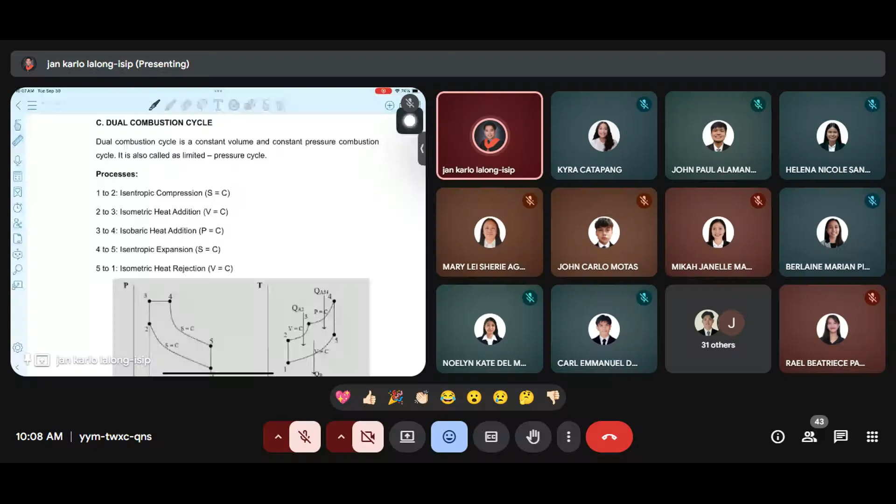When it comes to identification din natin ng ating state points, we have our pressure, volume, and temperature at different states ng ating cycle. So, I advise for you to kindly review, take note of that, kasi kung dun pa nga lang sa Otto cycle, hindi na masagutan, how much more if we have a dual combustion cycle.

Kasi in dual combustion cycle, we are now going to combine yung ating Otto cycle or the constant volume heat addition at saka yung ating constant pressure heat addition. So yung ating dual combustion cycle, that is a constant volume and constant pressure combustion cycle. So dalawang beses yung ating magiging heat addition. So by using that, we are making yung ating system more efficient. So it is also called yung ating limited pressure cycle.

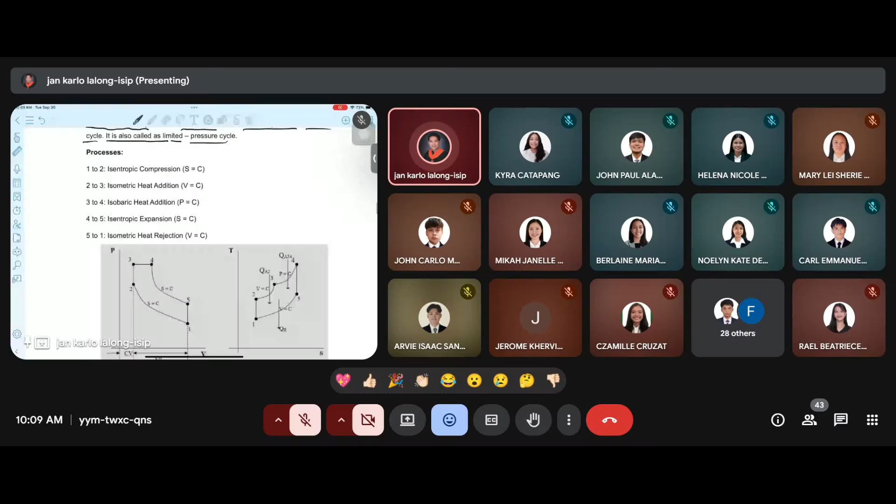So ano ba yung processes natin kapag sinabi natin dual combustion cycle? So ngayon, kapag meron tayong dual combustion cycle, ito yung ating PV diagram. So pareho lang naman, we still have yung ating intake stroke. So again, hindi na sinasama yung ating intake stroke diyan sa ating PV diagram. So wait lang, medyo delay pala yung screen. So we have yung intake stroke dito that is not already included in our PV diagram when we are analyzing.

But you must take note of that kasi as I can see, ang unti lang na nakapag-explain kung paano nangyayari yung ating four-stroke cycle or the combustion cycle natin using the four-stroke cycle natin. So, balikan din yun, alamin, kasi that is very important. Kasi hindi naman pwedeng alam lang natin ano yung processes. Dapat alam din natin paano gumagana yung ating four-stroke engine.

Okay, so again, we still have our isentropic compression dito. From state point 1 to state point 2 natin. Wait lang.

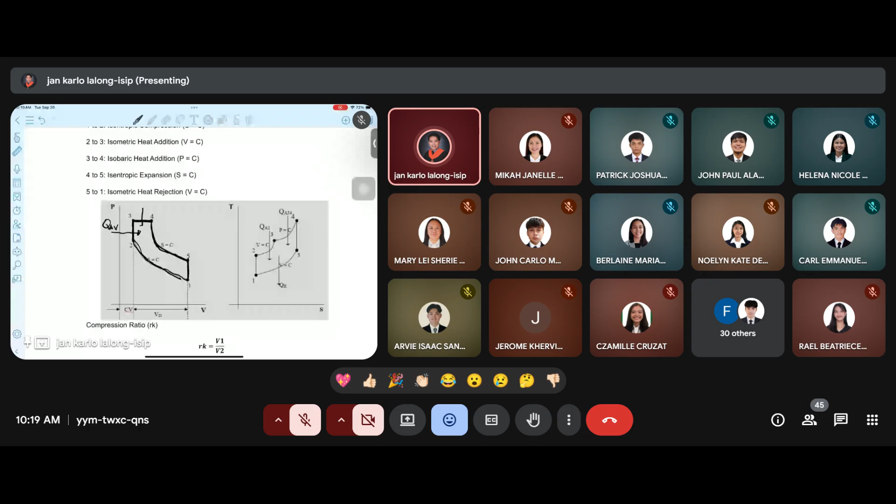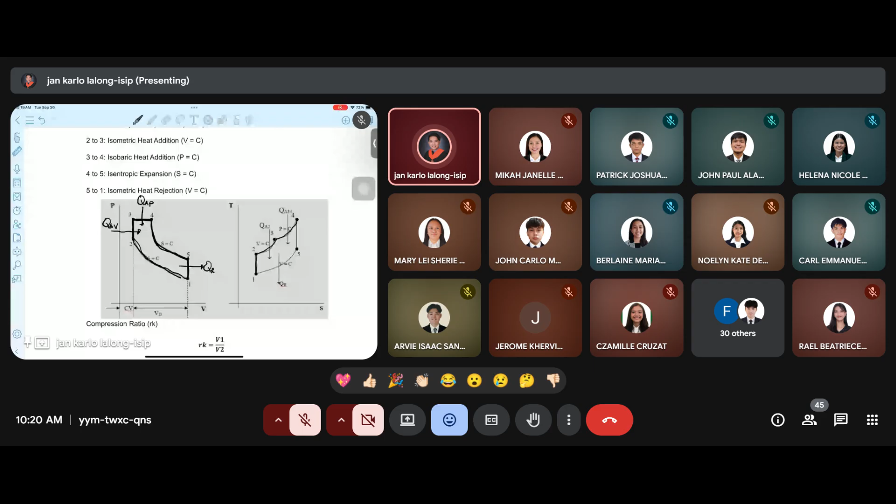So this is our processes and then our PV and TS diagram. Are we clear with our processes? So isentropic compression, constant ang ating entropy. And then yung una nating heat addition, that is isometric, and then isobaric heat addition, isentropic expansion, and then isometric heat rejection. Okay, are we clear with the processes and also the PV and our TS diagram?

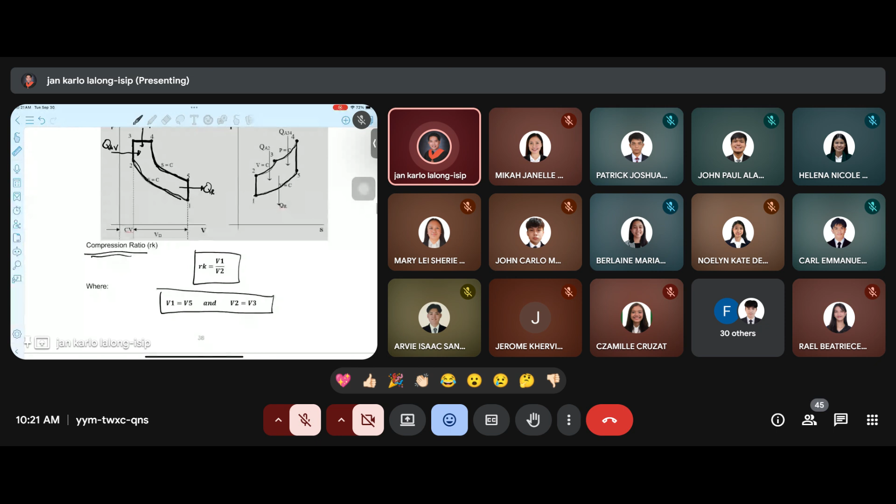Wait lang, nawala ba yung presentation? Yes po, sir. So wait lang. Try ko lang ulit siyang i-reconnect. Bumalik na ba? Yes po.

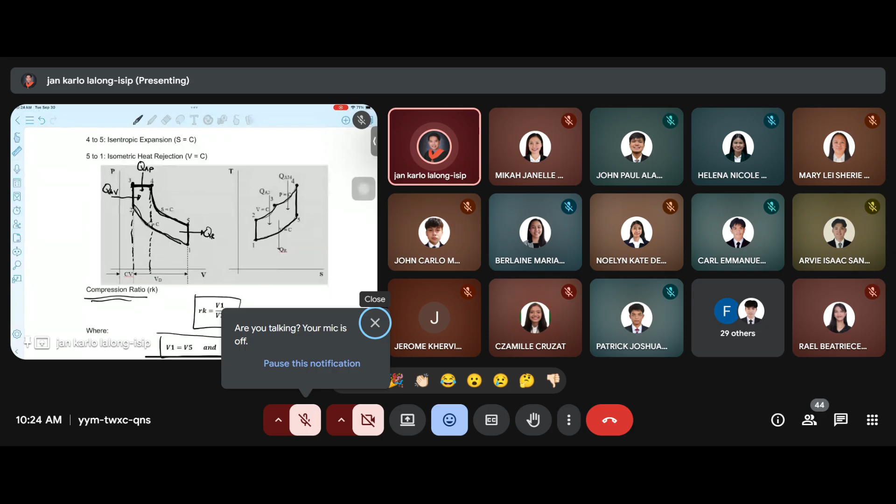So last time din nung quiz natin, I explained din sa ating recording or yung ating asynchronous class, yung ating cut-off ratio, yung ating cut-off clearance. So if you open or listen on that discussion, mas madali na sana natin masagutan yung ating problem number 2. There is a formula to get yung ating cut-off clearance. But then, hindi ko siya binigay for you to derive that formula. Minention ko dun sa ating recording paano kinukuha yung ating percent cut-off, and then, that will be the key para makuha yung ating efficiency. As I can observe, sa mga sinagutan nyo, medyo walang nakakuha nung sagot ng ating problem 2. So, kindly look back on our recorded class nung ating asynchronous class.

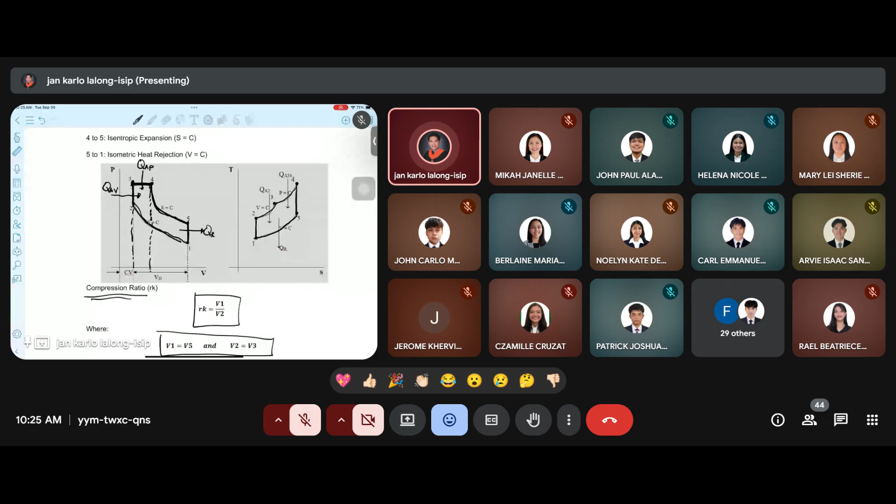Okay? So, that's for our cut-off ratio. That is our V4 over V3. And then, we still have our expansion ratio. That is volume 5 natin over our volume 4. So, same pa din naman yung ating displacement volume. That is our V1 minus V2. Percent clearance natin, same pa din naman yung ating magiging formula. So, we have our V2 over VD, or yung ating 1 plus C over C.

So, dito naman sa ating cut-off, ito yung formula na hindi ko sinabi. I'm expecting that you are going to derive this, but then yung iba pala, nakuha nila kasi siguro tanda pa nila yung formula with your thermodynamics. So, we have yung ating clearance plus our cut-off clearance over our clearance. So with this, makukuha yung RC. Wait lang, hindi lumalabas sa screen. So with this formula, makukuha niyo yung RC or yung ating cut-off ratio. And then we have RK, makukuha nyo na yung efficiency dun sa ating diesel cycle. Yun yung ating naging quiz last time, yung problem number 2.

Okay, so continue tayo. Yung ating clearance volume, same pa din naman yung ating formula. And then yung ating total heat added, ipag-a-add natin yung ating heat added at constant volume process and the heat added at constant pressure heat addition. So yung constant volume natin, yun pa din naman yung formula natin, MCV delta T. So that is T3 minus T2 natin. And then at constant pressure naman, that is MCP, T4 minus T3. So wag malito ha kung kailan gagamitin yung ating CV at CP. Yung CV natin, gagamitin yan kapag constant volume. Yung CP natin, that is for constant pressure.

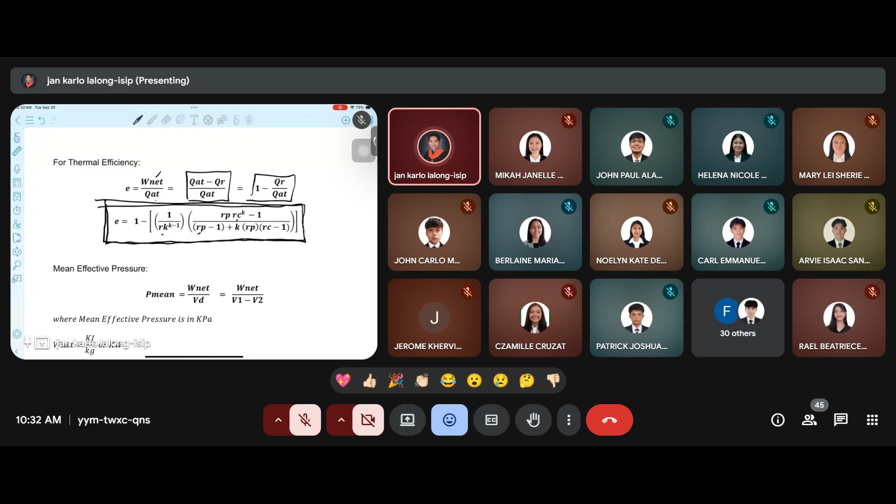So, we still have yung ating work net over our total heat added. So, ito pa din yung formula natin, and then this one. Using our compression ratio, pressure ratio, and cutoff ratio, you are going to use this formula. So, pahaba yung formula natin ng efficiency, from Otto to diesel, and then now for dual combustion cycle. Okay, so for the mean effective pressure naman, that is still this formula. Pare-pareho naman yan, nung Otto natin, nung diesel, and ngayon, yun pa din yung ating formula. Okay, so proceed tayo with the sample problem using these formulas.

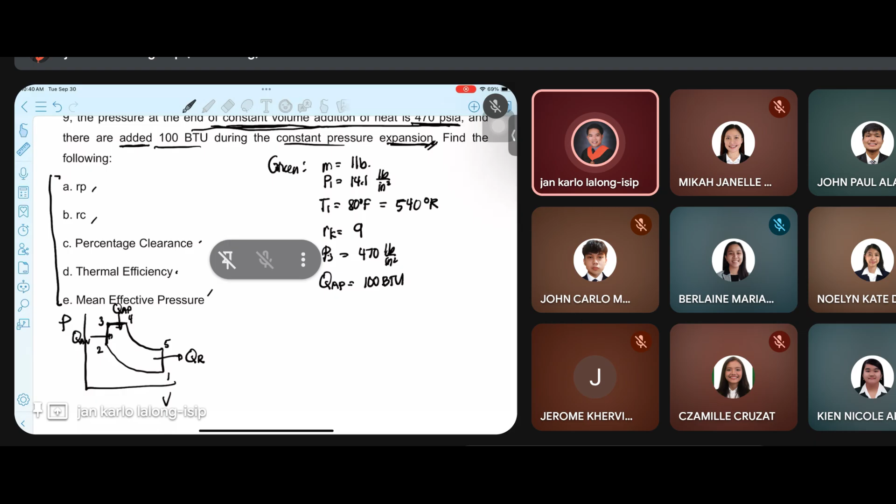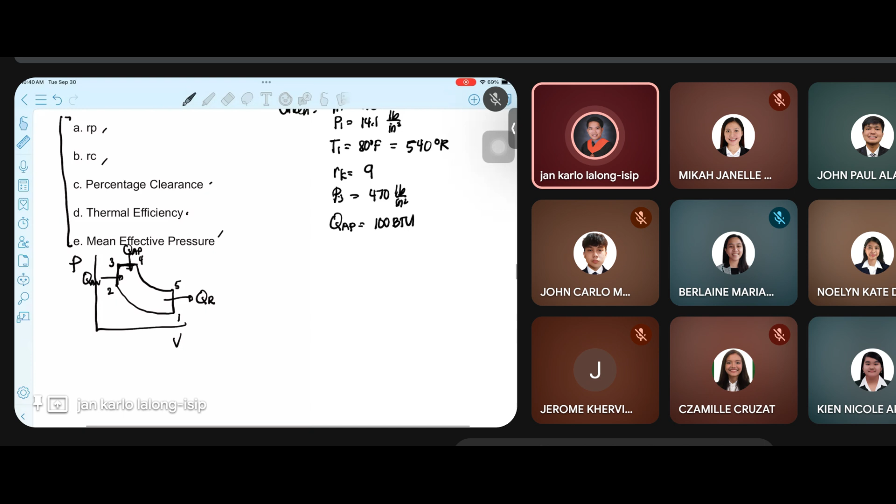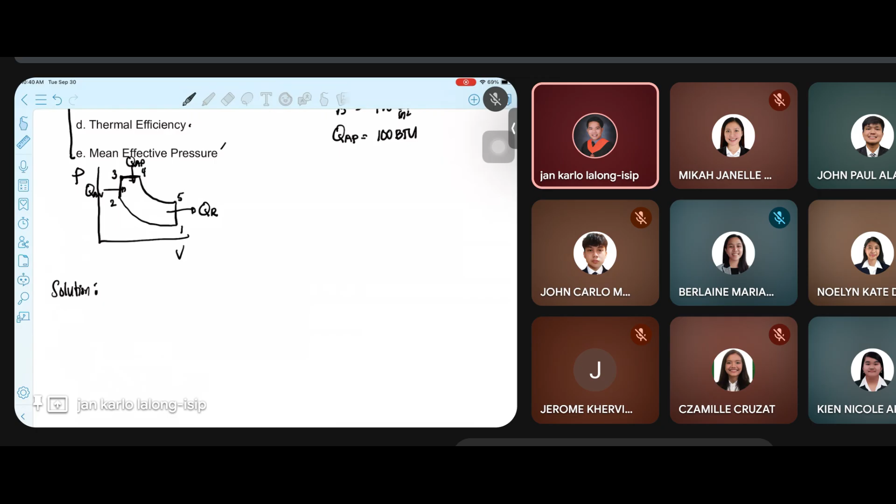Okay, so let's proceed na with our solution. Unahin natin yung ating mga pressure, volume, and temperature. You have copy naman ng ating lecture notes, so kindly look na lang dun. So for our solution, unahin natin kunin is our pressure, volume, and temperature at our different state points. It depends to you naman kung saan nyo yan sisimulan. Ang mahalaga, makuha natin lahat ng kailangan natin for us to solve the required. So in my solution, unahin ko na muna yung ating V1. So paano kaya natin pwedeng kunin yung V1 using this given? So we have given na M.

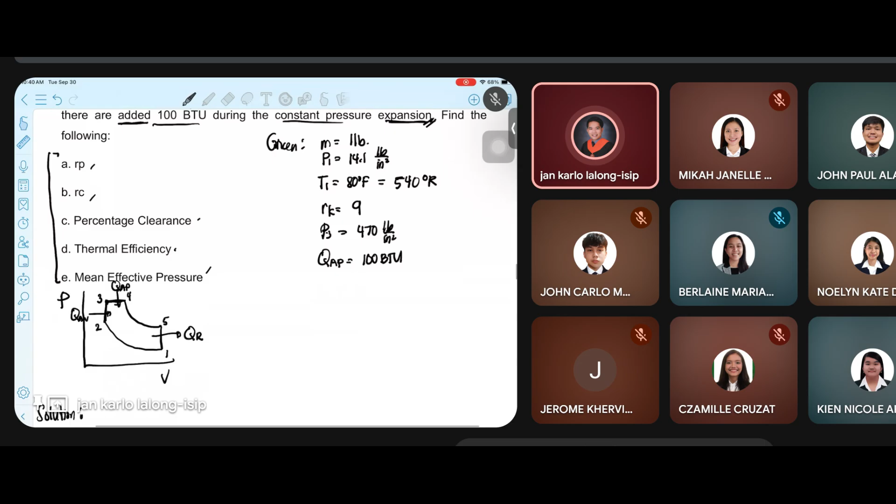Let's have si Sarabia. Nandito ba si Sarabia? Gianpaolo? Wala din. Delen?

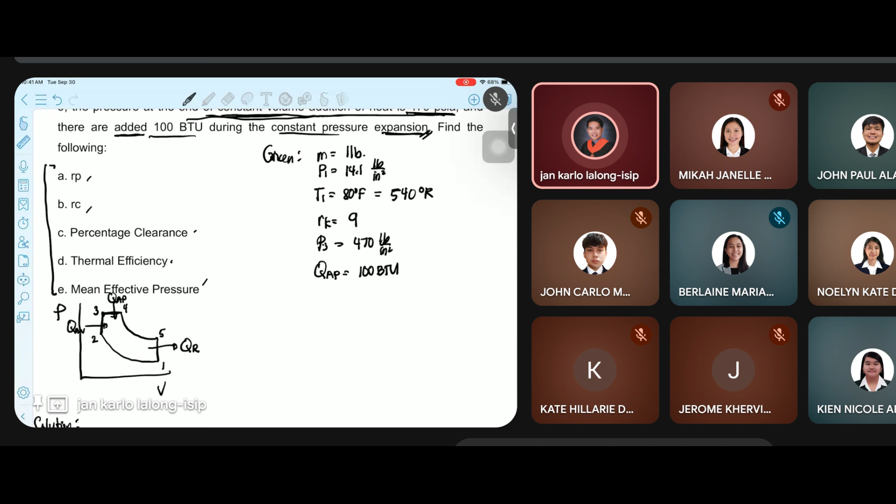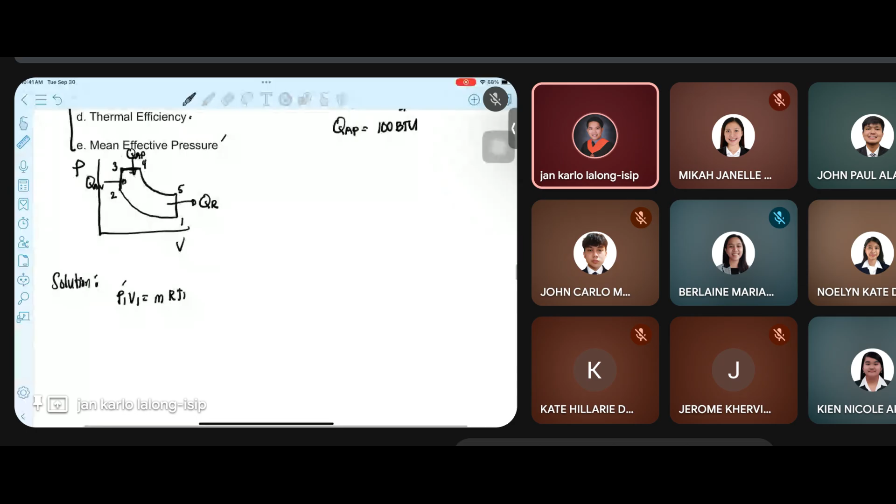PV = MRT po. So since meron tayong P1, meron tayong temperature, meron din naman tayong mass, so makukuha naman natin yung ating V1. So we have here our P1 V1 is equals to MRT1. So may given tayong P1, meron tayong mass, yung R naman natin, just use yung standard value since wala naman mention dito. And then our T1. So let's solve for V1. This is MRT1 over our P1.

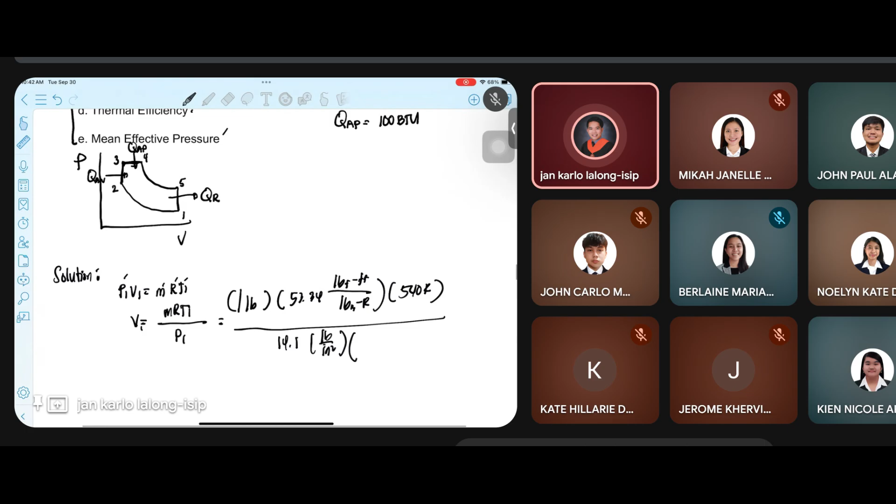So yung mass natin, that is 1 pound. And then we have here 53.34 pound force feet per pound mass Rankine. And then we have 540 Rankine over yung pressure natin, that is 14.1 pound per inch squared. And then naka-feet yan, so dapat feet din yung ating magiging unit. So conversion natin, 12 inch per 1 foot, and then dapat naka-squared yan. Okay, so with this, ano yung makukuha nating volume 1?

Katapang, Kyra. So, cancel lang yung pound mass natin, cancel yung Rankine, cancel yung pound force, saka yung inch square. Ano yun? Andito ba si Katapang? Wala din? Del Mundo? Sir, 14.2875 po.

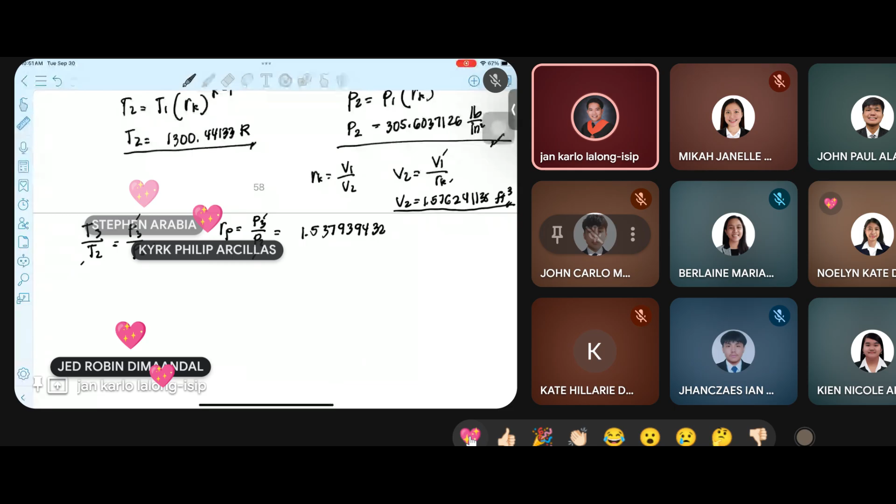1.537939432. So this is our pressure ratio. How about the others? You have the same answer for our RP? Okay. So ngayon, makukuha na natin yung T3. That is equals to our T2 times yung P3 over P2 natin. Again, that is our pressure ratio. So ano yung value natin for our temperature T3?

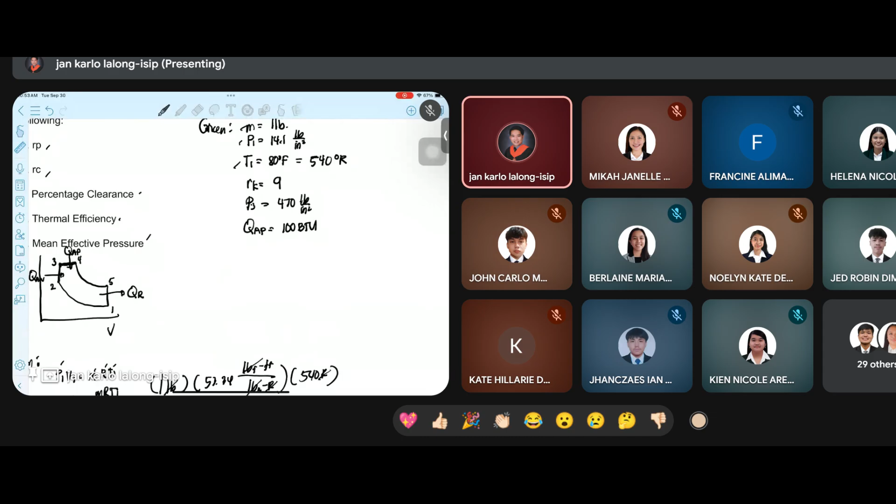Okay, so next natin, let's have our state point 4. So, balikan natin yung ating figure dito. So, yung P4 natin, again, that is equals to our P3. So, meron na tayong value ng ating P4. And again, yung P3 natin is 470 PSIA or pound per square inch absolute. Okay, so meron na tayong pressure.

So, kunin naman natin yung ating T4, temperature 4. Paano kaya natin makukuha? We can use yung ating formula for heat addition kasi given naman yung heat natin, di ba? So, we have our QA at the constant pressure heat addition equals MCP times T4 minus T3. So, meron tayong value ng Q, binigay yan sa atin. And then may M tayo, may CP, and then may T3 tayong na-solve kanina. So, pa-compute nga, what will be the value ng ating T4?

Baryon. Nandito ba si Baryon? Okay, so paki-compute na lang ng T4. Ano po sir? 1,124.795322 po. Makikita naman sa chat box.

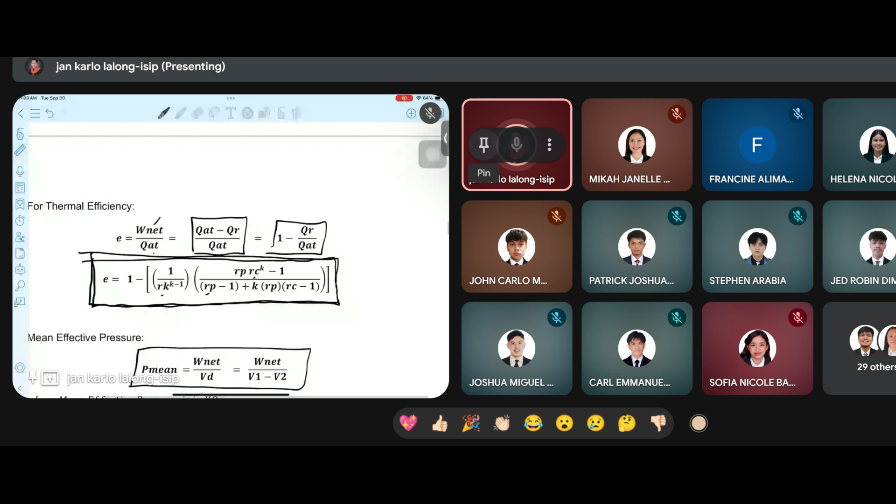Where the dual, tama naman, no? 1 minus 1 over RK raised to K minus 1, RP times RC raised to K minus 1 over RP minus 1 plus K times RP RC minus 1.

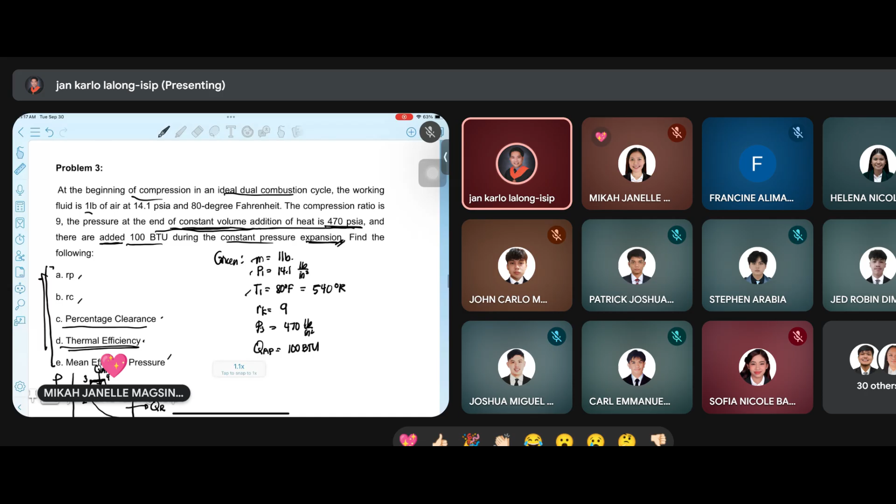So later, ang ipapasa nyo sa ating Google Classroom for the second batch ng attendance natin, kasi meron mga hindi sumasagot. And for your activity for today, you are going to resolve this sample problem 3, and you are going to pass it sa classroom mamaya kasama yung ating sample problem number 9. So you're going to re-answer yung problem 3, tapos ipapasa nyo din yung problem number 9. Okay? So are we clear with that? So do you have any question with our discussion for today? So that will be true naman until 11:59.